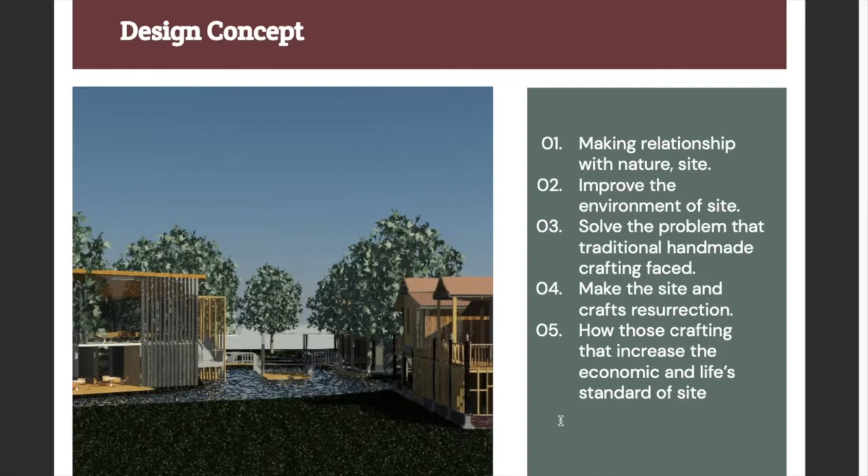Before starting my presentation, let me introduce our project. Our project is designed as a cultural center linked with the Pura Tanjung Sabtu, the existing building on our site at Terengganu. My design concepts are making relationship with nature and site, improving the environment of the site, solving the problem that traditional handmade crafting faced, making the site and craft resurrection, and improving the economic and life standard of the site.

So I've done the micro site context, and as you can see, the most tourist area is there, and the sun path and wind direction are also done, and the SWOT analysis was written down by me, and we found it has a few advantages and a few disadvantages.

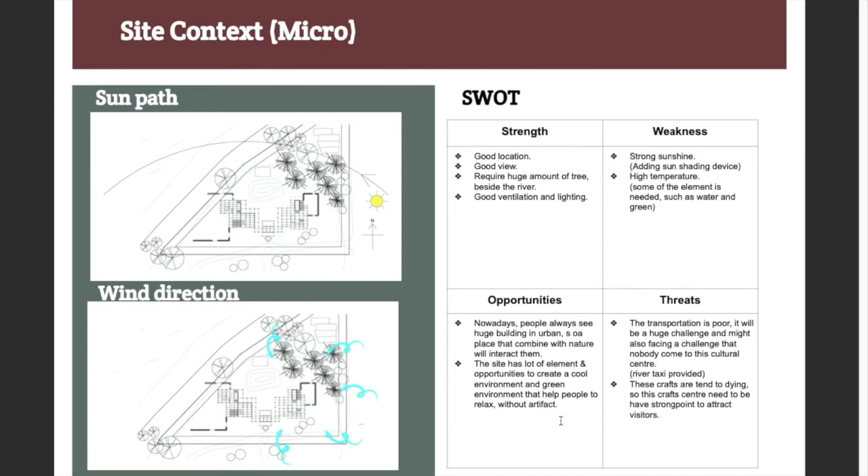Advantages such as good location, good view, good ventilation, but the strong sunshine makes the temperature higher, and the transportation is poor, so river taxis are provided by me. The sensory analysis also shows the view, the sound, and the smell.

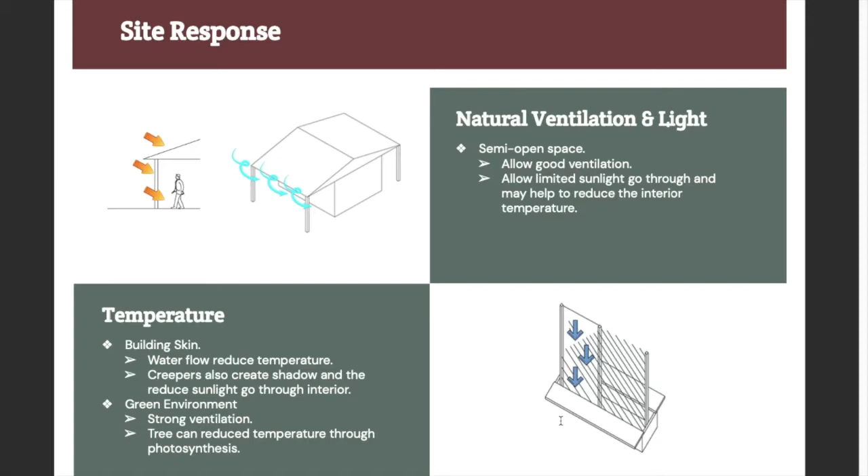About the site response, a lot of semi-open spaces will be used due to the good natural ventilation and good natural lighting. My building skin helps the water flow, which helps to decrease the temperature of the site, and the green environment of the site will also help to reduce it.

The residential area - because our site is near the residential area, we also need to think about how to reduce the influence on the resident area. And for the view, lots of glass will be used to achieve a good view.

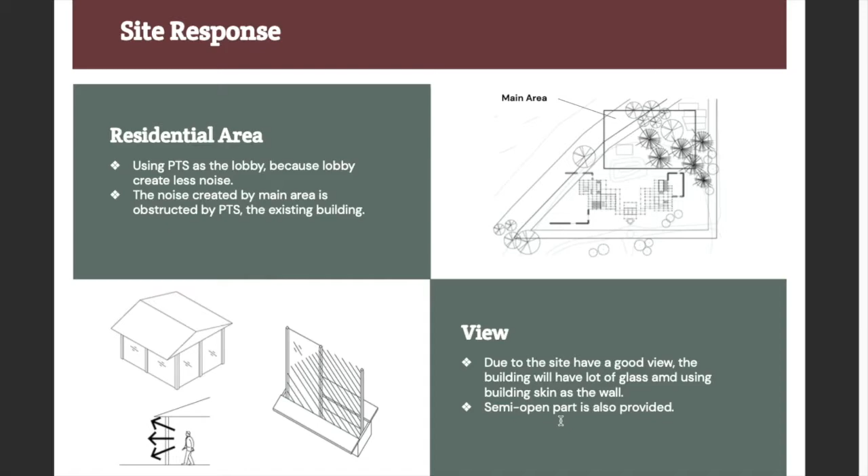So my design concept is about making the relationship with the forest and the nature. I need to discuss which part is better for my cultural center.

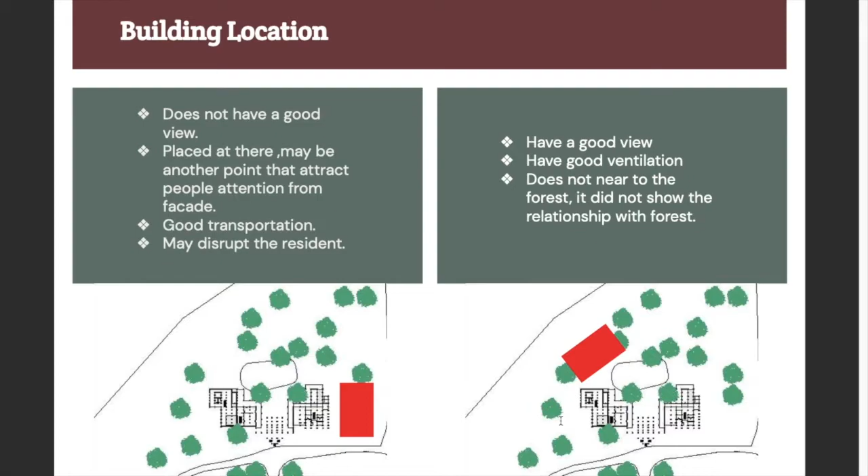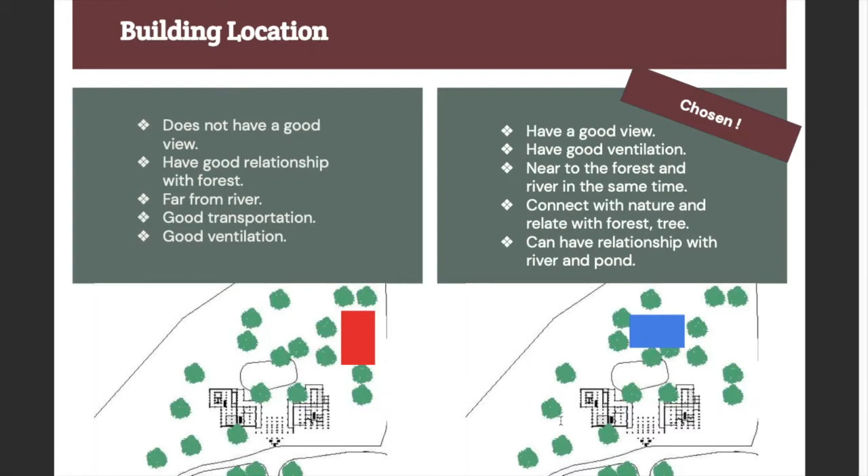This location was chosen because it has a good view, good ventilation, and is near to the forest, the pond, and the river.

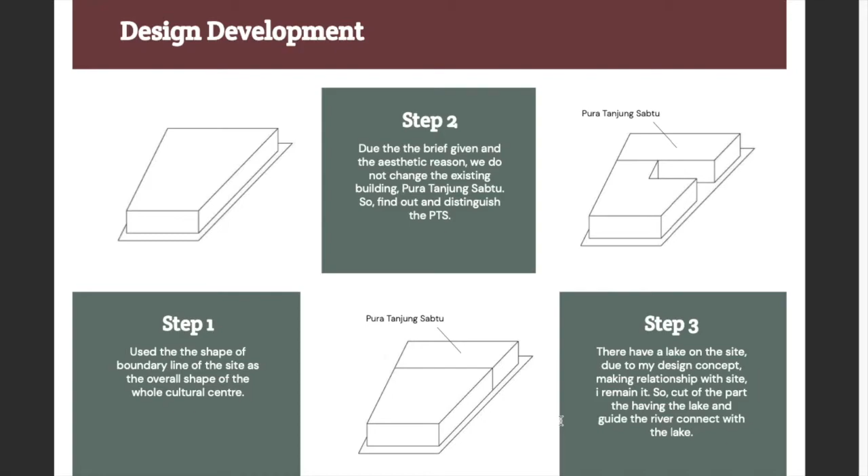Step 3: since I need my cultural center to make a relationship with the river and the lakes, I let the river and lake connect, and then I adjusted the shape to leave spaces for the lake.

Step 4: I divided it into the workshop part and the facility part, and the workshop part is also divided because I have two craft programs - the first is batik, and the second is woodcraft.

The principles of layering and hierarchy are used in my cultural center, because these two concepts are often shown in batik and woodcraft in Malaysia.

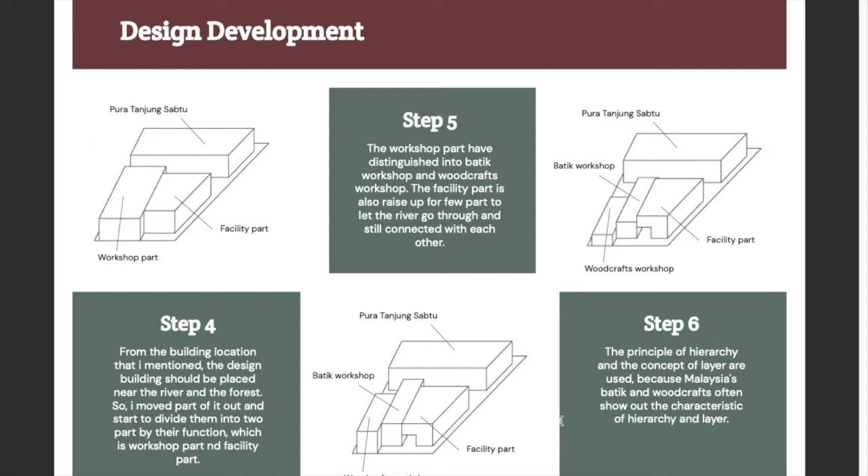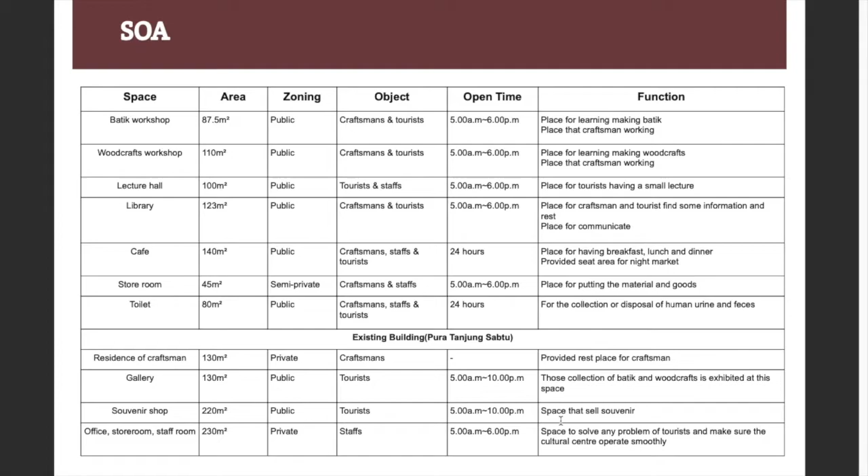So this is my SOA. Our requirement is the design building can't be more than 800 meters square, but that is not including the existing building. This is a human diagram of us.

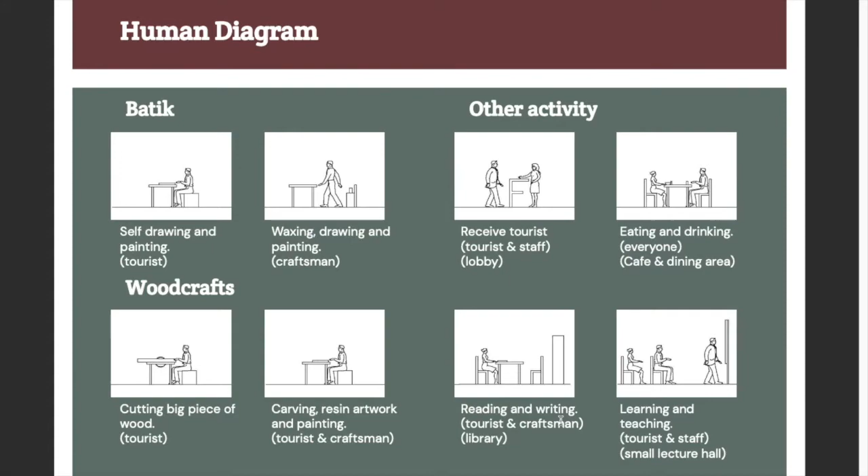Batik, woodcraft, other activities, eating and drinking, learning and teaching, like that.

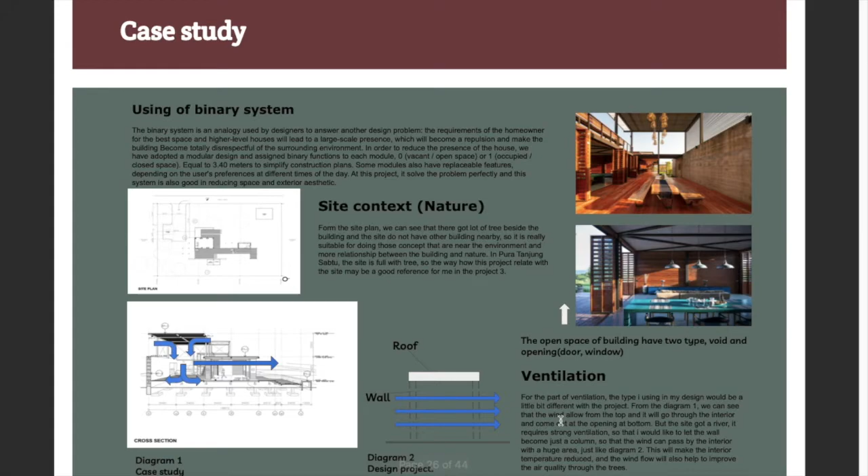And this is my case study. The case study is at Thailand. I chose this because it has huge semi-open spaces, and it allows good natural ventilation and natural lighting.

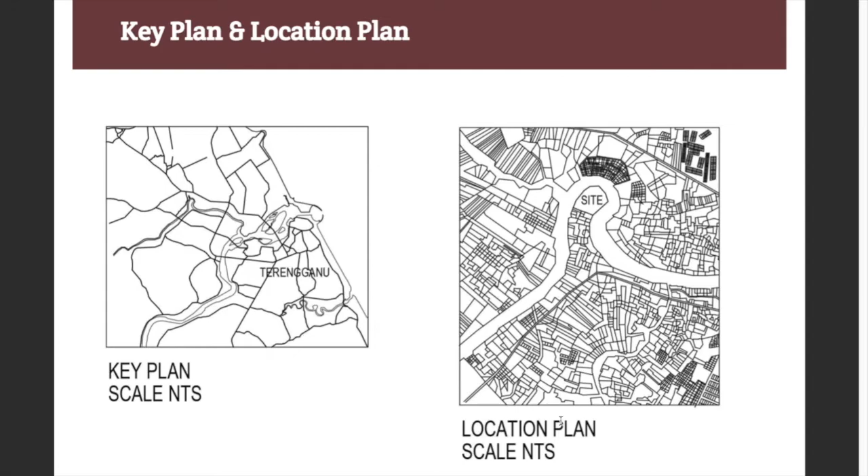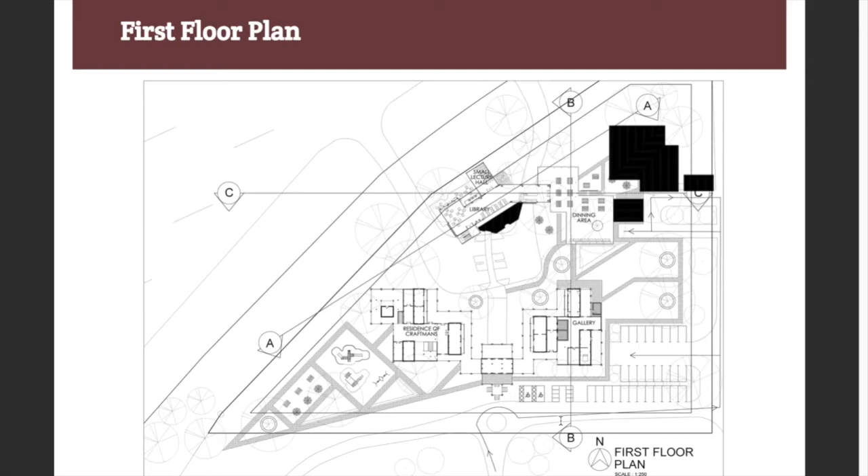After a 10-minute small lecture briefing them, they will go through the dining area and down the staircase, and they will reach the batik workshop and the woodcraft workshop. So they can have their experience at these two parts.

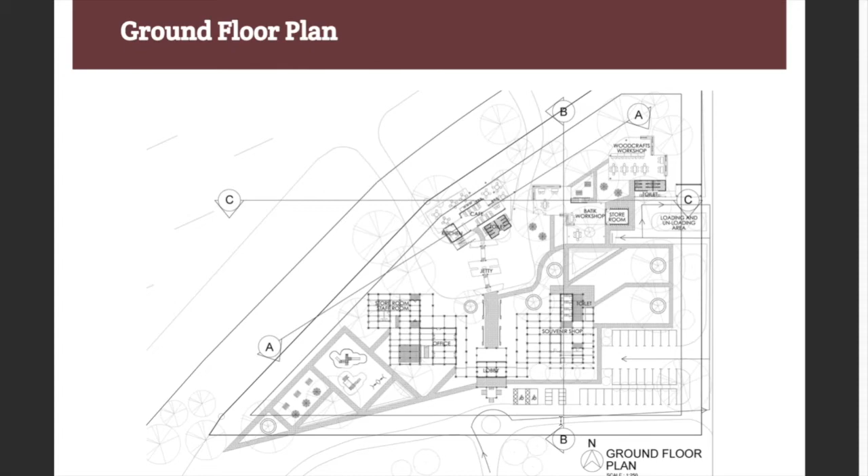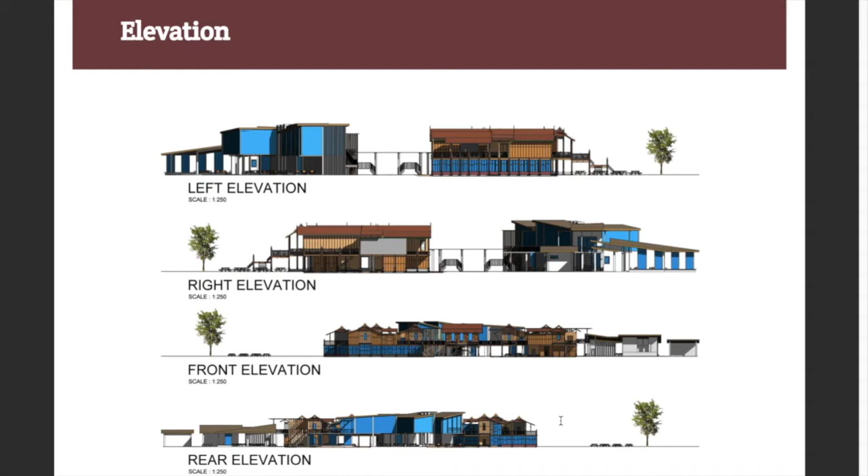So this is the ground floor plan, and this is my elevation from the left, right, front, rear. This will be the section.

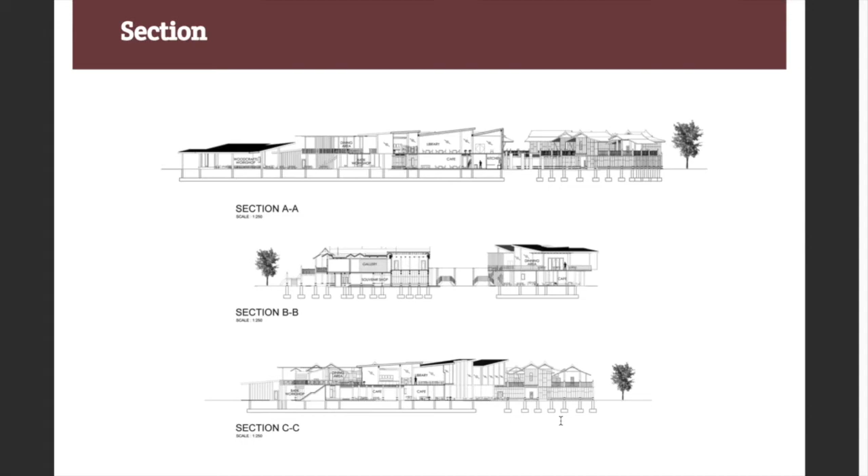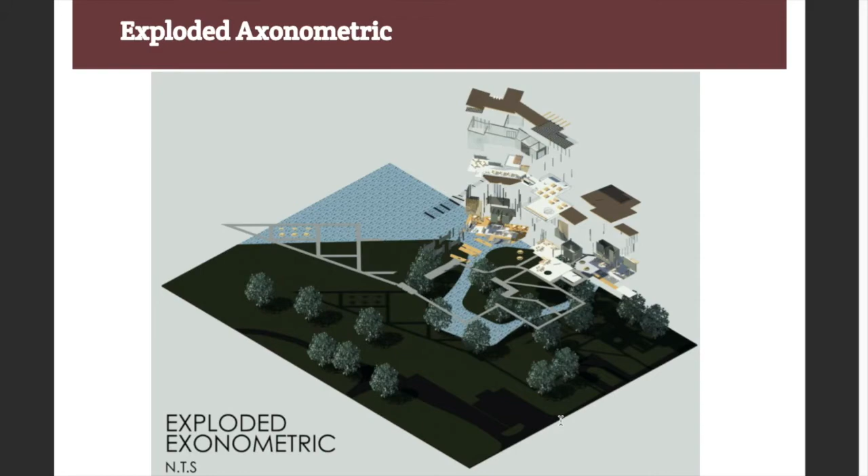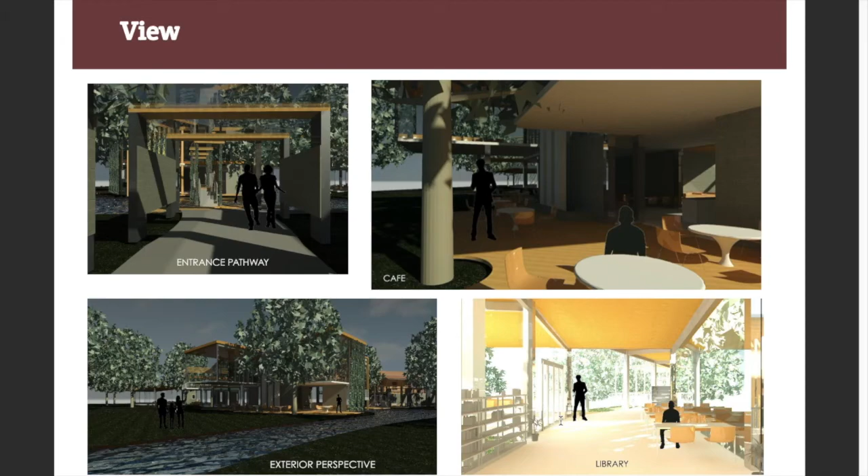And the views are shown, some of them, like the entrance pathway, the cafe, the exterior perspective of it, the library here, the batik workshop, the dining area, exterior perspective, and another exterior perspective.

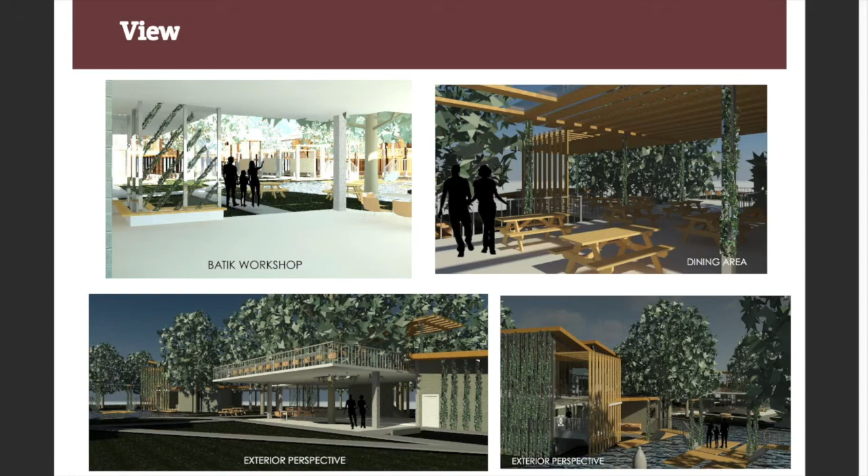This is the circulation of the tourists. As you can see, it is a circle for them, so it's helpful for them to find a way to their destination.

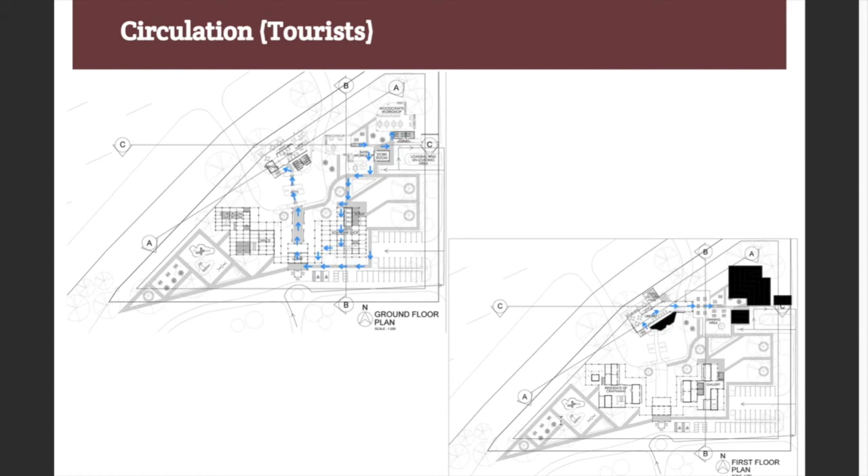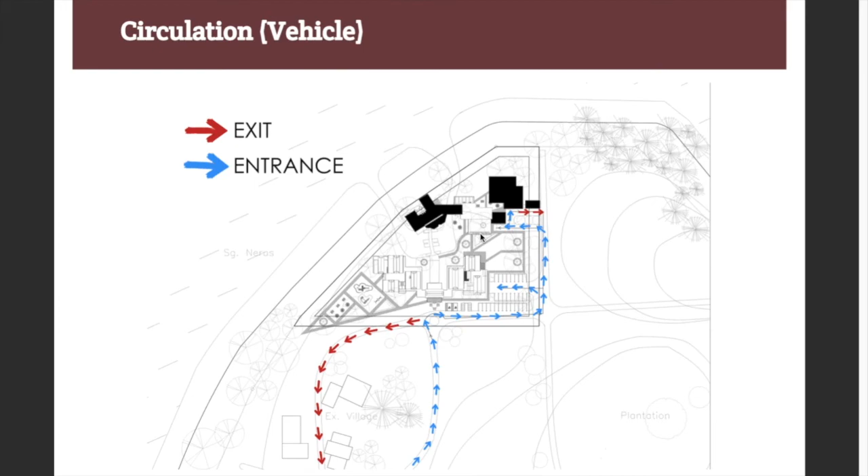This is the circulation of the vehicle. The red color is exit, and the blue color is entrance. And this part is actually the loading and unloading area.

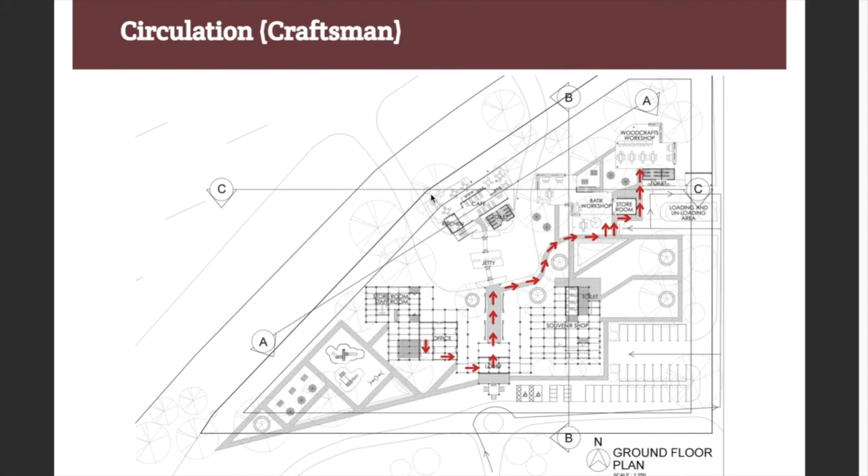So this is the craftsman's circulation. They go down from the residence of the craftsman, then walk through the lobby and the pathway. Then they reach their destination, which is the batik workshop and the woodcraft workshop.